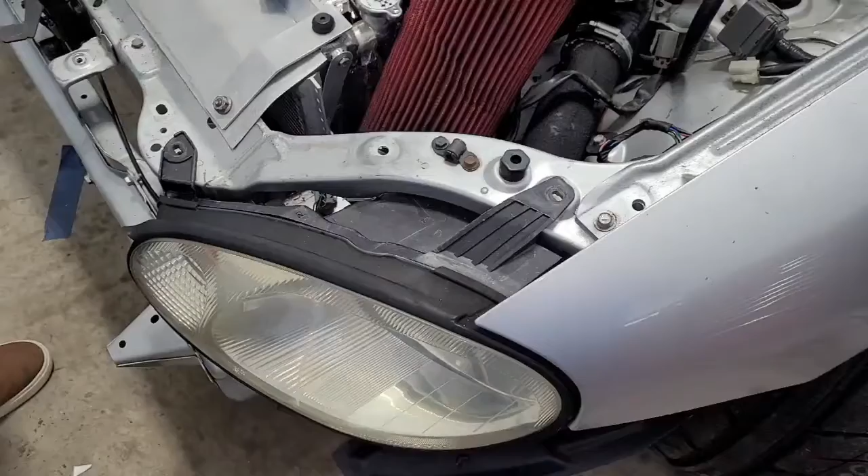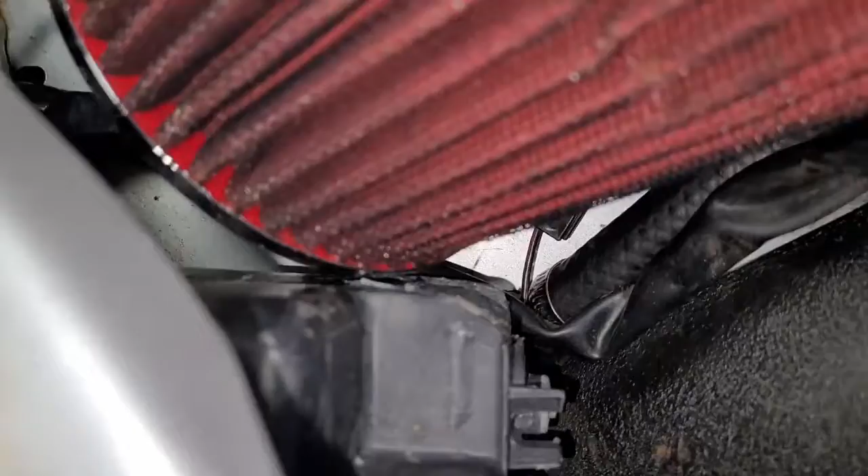So my buddy Jacob said, hey, we should test fit a headlight, make sure it's going to fit. So I put this up in here and got it roughly lined up. He was worried about it hitting the air filter, and I was like, look, we got plenty of clearance. I mean, look at this. We don't have feeler gauges, but that's at least 20, 30 thousandths. I don't know what he was worried about.

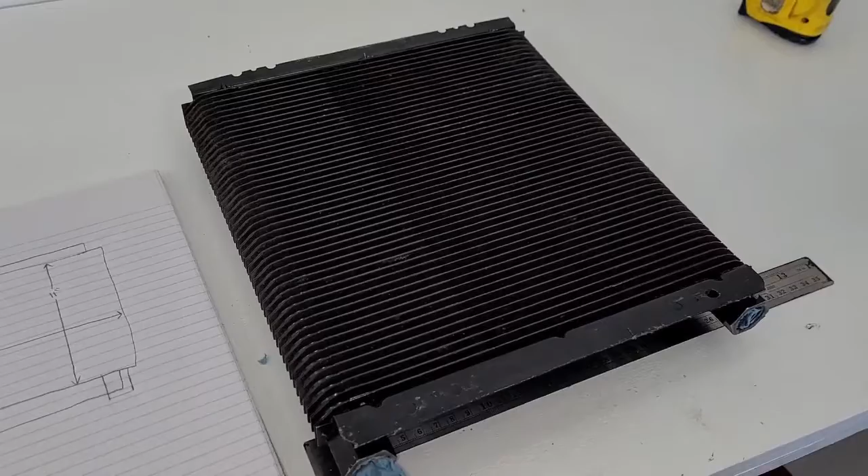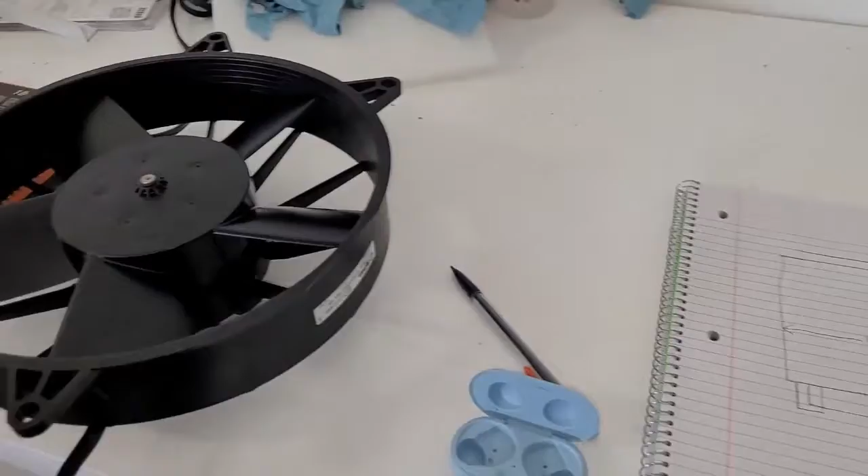Hey guys, welcome back. So we decided we're going to build this fan shroud the way we talked about. The first thing we got to do is get accurate dimensions from the heat exchanger, and we need accurate dimensions on the fan, and then we can put both of those in our 3D modeling software and develop a shroud that fits the two, so we know what we build will fit these components.

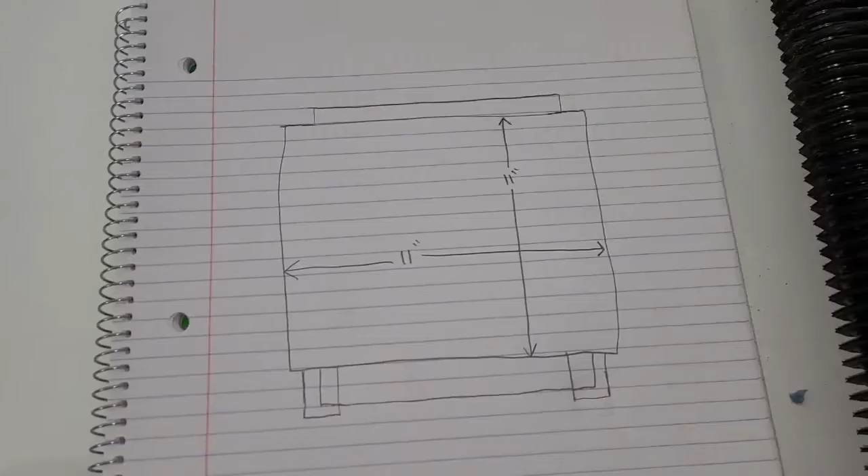My buddy Jacob here is going to help me build this. We laid this heat exchanger out on a bench. We got a rule, a tape measure, a caliper, and just a piece of paper and a pencil. We already started, as you can see here, we got the basic outline of the core itself. If you notice, we trimmed this top flange previously, so we don't have the full flange there, whereas on the bottom here, we do have the full flange.

So we're going to document the dimensions that we have. I think we can make this work. We'll just have to drill some extra holes in this section, but it should be big enough. So we're going to get our critical dimensions, which is basically just the core, the flanges, and then we're also going to model the fittings and the thickness of the core. That'll pretty much sum it up for the heat exchanger.

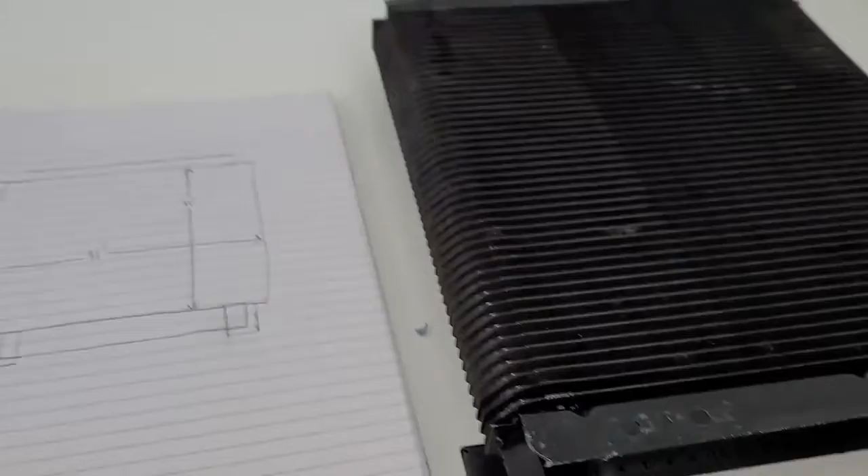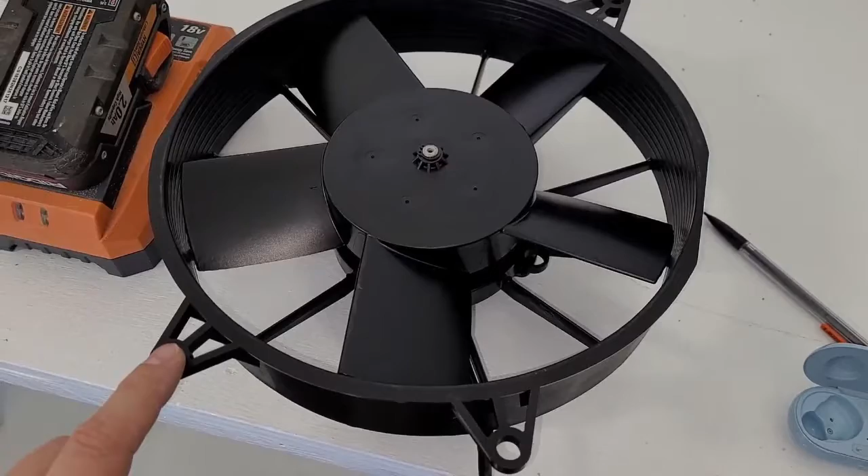And then on the fan, we don't need to worry about all this, but we'll get the outside dimensions, the center to center on all the holes for the bolt pattern, the general thickness, just the rough outside dimensions, and that's about it. So I'll show you that progress as it develops.

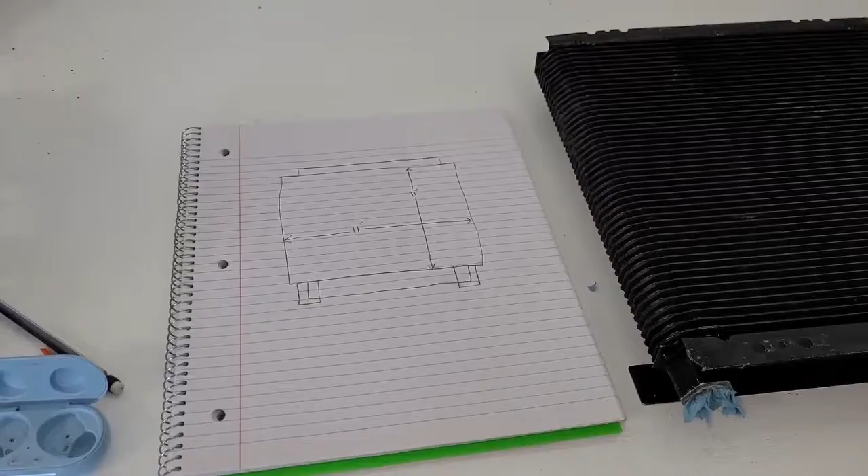Alright guys, here's some of our dimensions. Jacob's finishing up the measurements, I'll show you what we got. He's measuring these fittings right here, we'll have that shortly. But you can see we drew our flange down here, and we picked up all our holes using a caliper, got our dimensions.

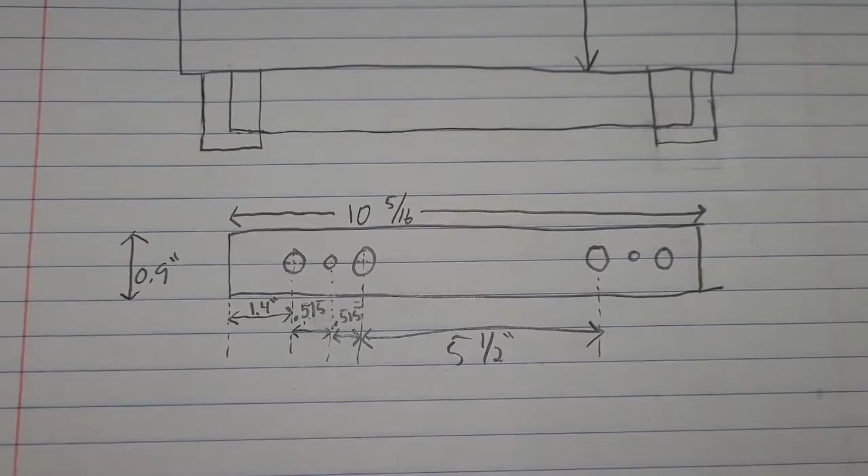And you can see some of these are common numbers like 0.9, 5.5. So that kind of gave us confidence that we got this right. But we did measure it with a caliper, so we got those dimensions.

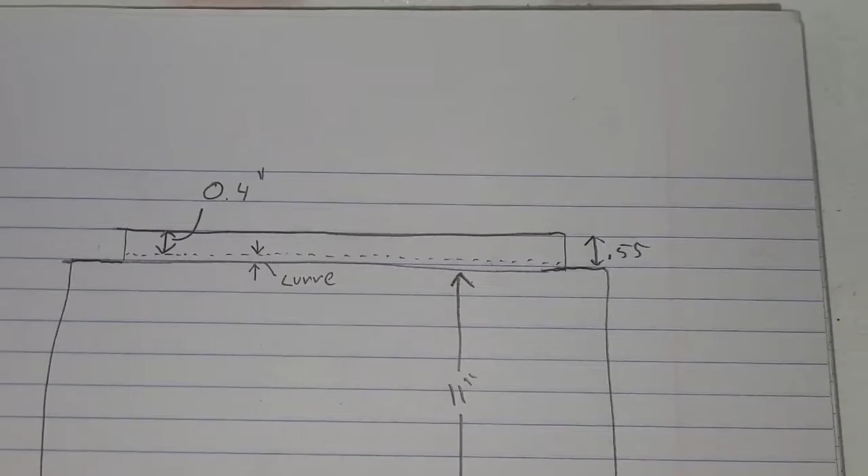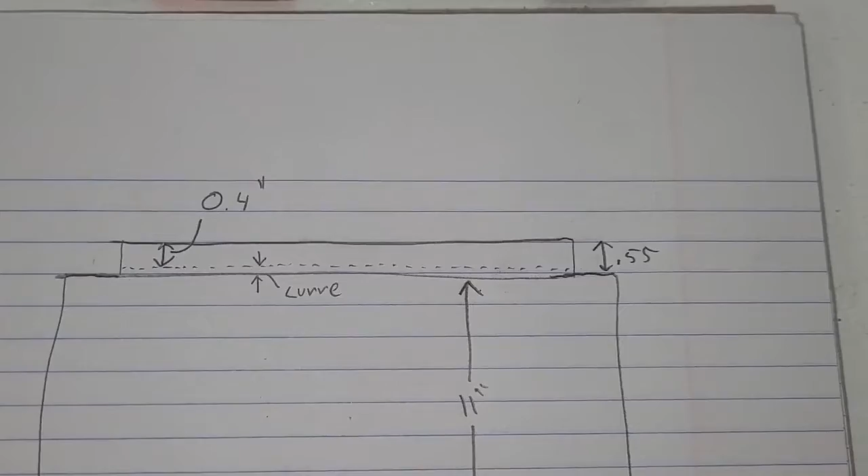And the flange up here is basically a mirror image, but we had cut that one short, so we included only the relevant ones. The total flange was 0.55, but there's a little radius where they bent the metal, so the flat portion is only 0.4 inches on that one. You can see we lost about 0.15 due to the radius. So this one down here, we also are going to have lost 0.15. I should probably make a note that that's true.

And that gives us the rough dimensions for the heat exchanger. We still got to pick up the thickness as well, and then we'll put the fitting dimensions, and that'll be it for the heat exchanger.

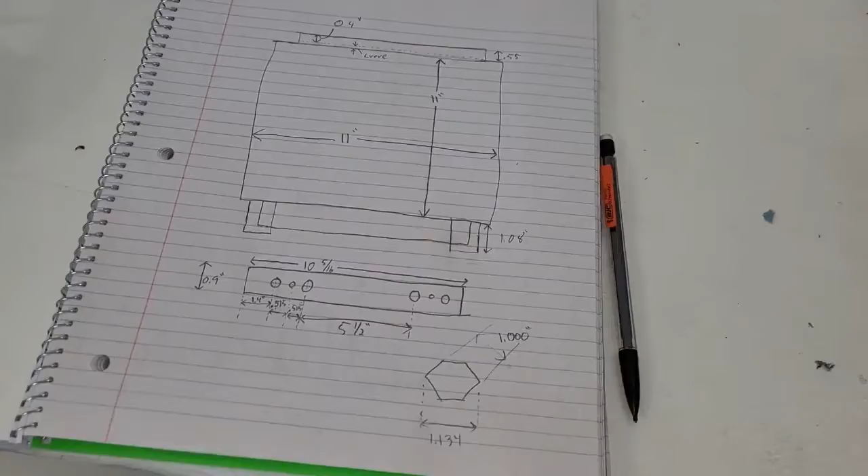Alright, so we finally got the rest of these dimensions. So we captured this hex, which is actually just one inch on the flats. And I'll show you, we got all the flange dimensions here, but look, we got two more pages.

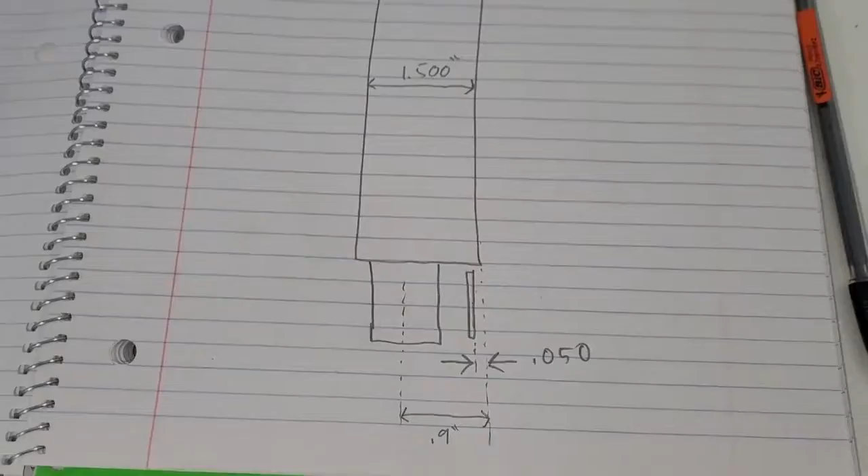So here the core, we captured the core thickness of 1.5 inches, and we picked up our flange as 50 thou. Oh, we forgot to measure how thick the flange is, but it's 50 thou away from that surface. And then we got the center distance from the core to the center of the fittings.

And then lastly, we noticed the core, if you look at the side profile, it actually has this weird geometry going on the edges. It's not square, and it's kind of hard to see, but they actually put a radius and then a 45.

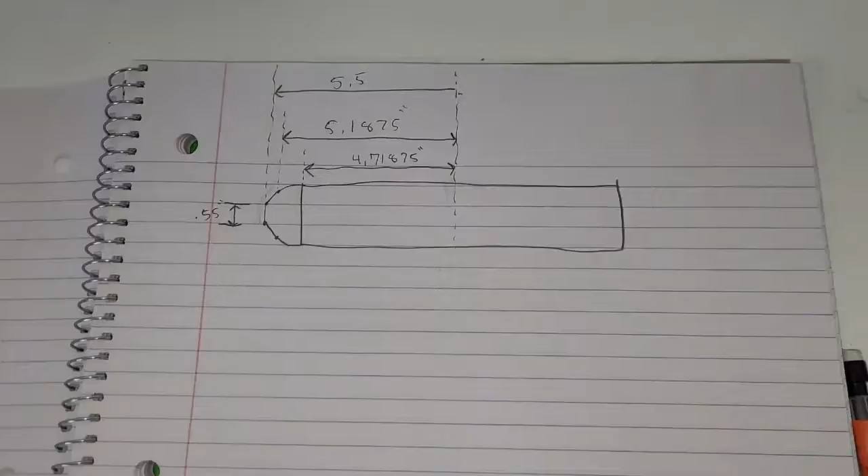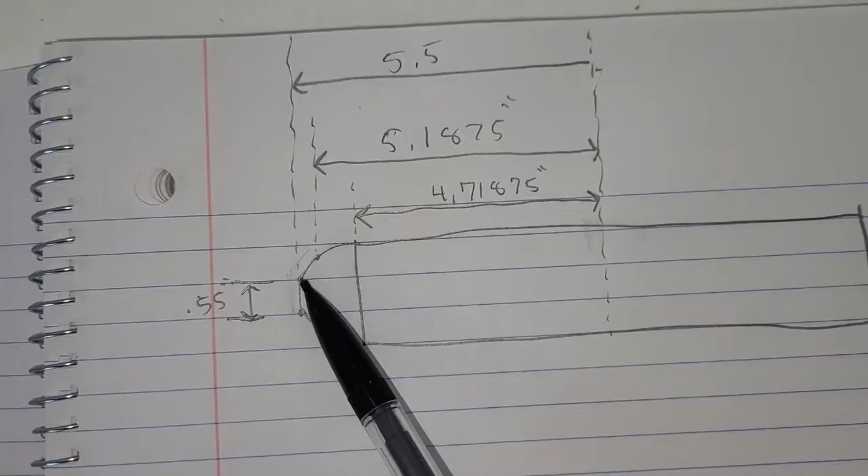So we ended up capturing those dimensions as well. This is from the center of the core. You can see we've got our little radius. We don't know what the radius is, but we know it exists, and we know it stops at this dimension. And then this 45, probably should have put that that's a 45.

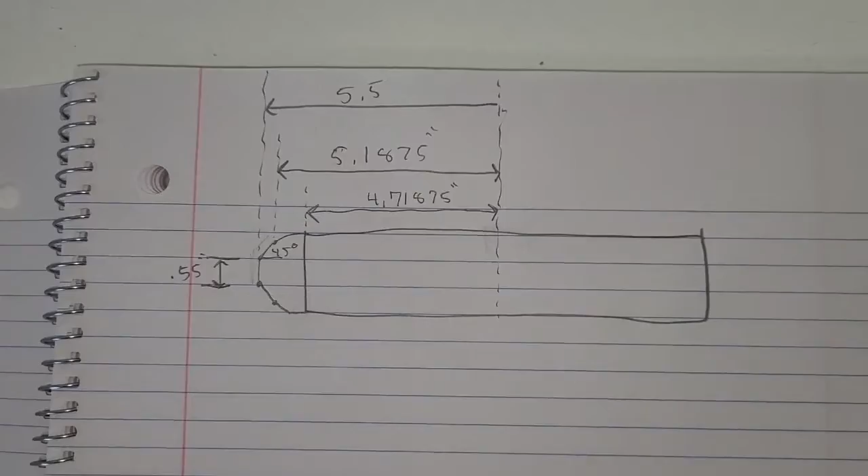But that continues, and then we know what the flat is. So we kind of measured the things we could, and we'll figure the rest out in CAD. We'll grab the flange thickness of the sheet metal, and I think that'll do it for the dimensions on our heat exchanger.

So we're getting ready to pull our measurements for this fan, and we actually looked on the box. The box does have a few dimensions, but they only have these three: length, width, and depth. That's really it. We need the center to center on all the holes. And here's the thing, it's kind of hard to measure. So if we flip this over, you can try to measure, but you don't really have a reference.

So here's what we're going to do. We're just going to take this old box and cut a flat piece of this and lay the fan on it. And without moving it, we'll use a Sharpie or a pencil, and we'll draw the center of each circle. And then from there, we can remove the fan and put a tape measure or a caliper or something directly on the cardboard and pull our measurements that way. So hopefully that speeds this up some.

Alright, so we just threw the fan on here and drug a pencil around it, and here's what we got. Now we've got all of our dimensions on a flat sheet of cardboard, and we may need a bigger ruler, but now it's as easy as just creating a datum and taking measurements. We also drew the circle, so that's roughly the dead spot in this fan.

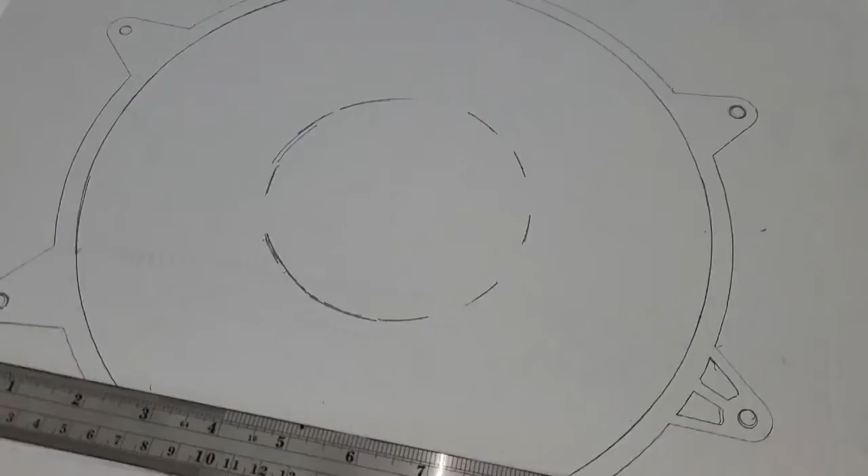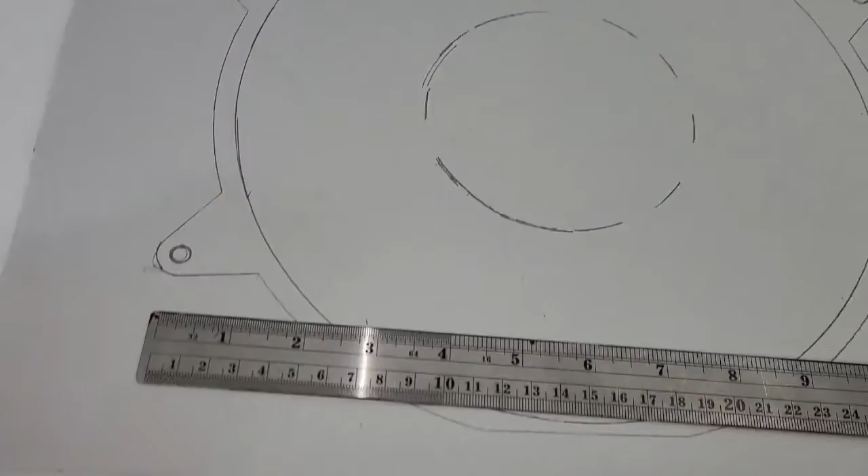So if you look at the fan, you'll see it's got blades, but there's this huge dead spot where the motor and fan blades connect, where there's no airflow, which is what you're trying to fix when you build a shroud. You're trying to get air to flow in this portion, and also, our heat exchanger's like up here, you know? So this corner would get left out, and so with our fan shroud, we're basically feeding airflow to this portion of the heat exchanger on all four corners, and also feeding air to the center. So we get more even airflow and hopefully more heat transfer, for a more effective heat exchanger.

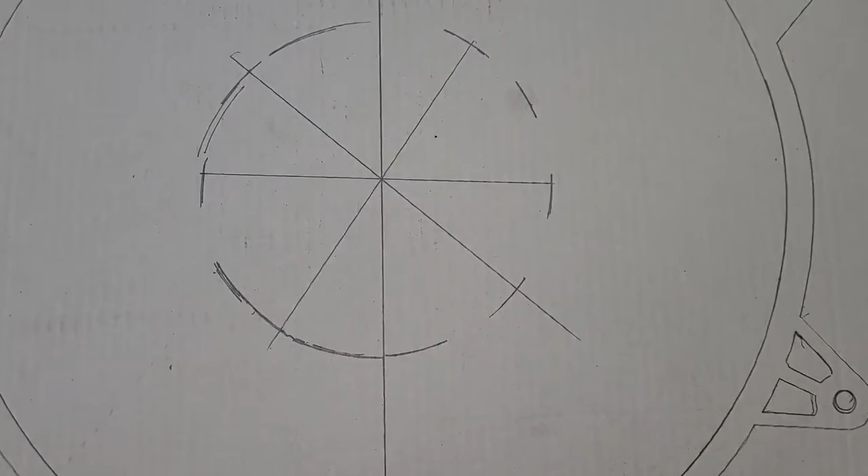Alright, so we needed a datum to have a center to work off of, so what we did was we just drew a straight line in our circle from, say, here to here, there to there, and as the lines intersect, that shows you where the center is. So you can see it's easy to see now. Now that we know where the center is, I want to draw an XY coordinate system on here. So if you back up a little, we see we got a little carpenter's square.

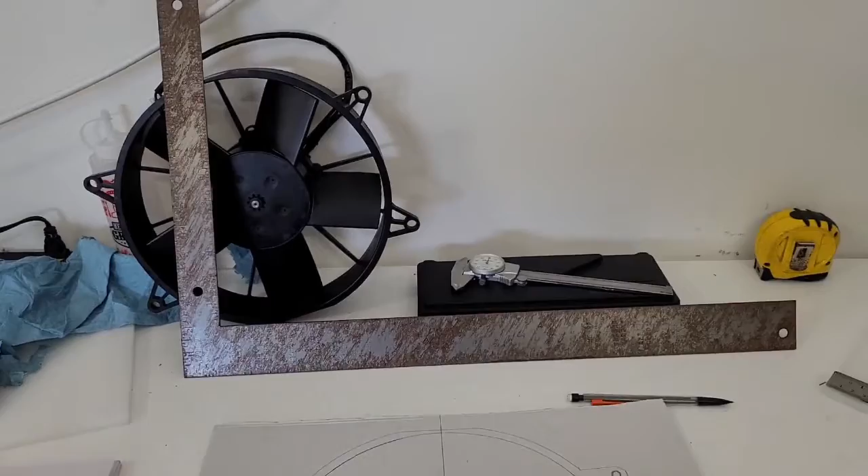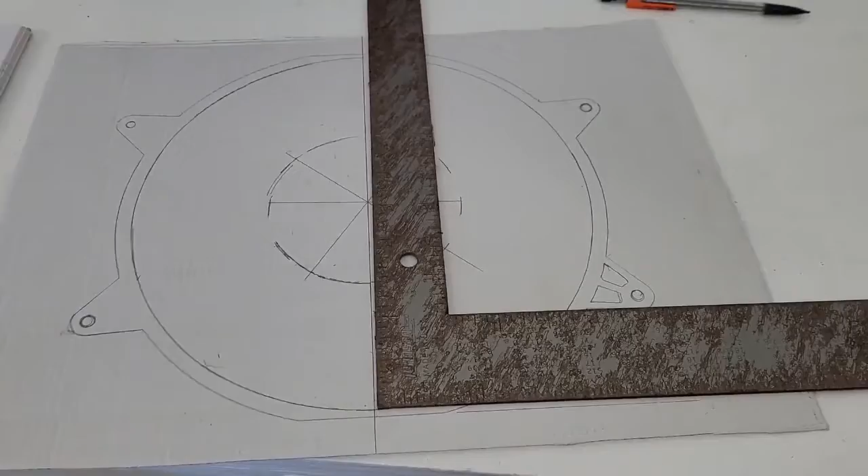And all we did was, there's a flat down here on the fan. So roughly speaking, we just took our square and lined it up off that flat and then extended that line that way. And once we had that, we used that line squared over here to draw our y-axis. And now that we have our y-axis, we're going to come up here, line up on our y, and draw our x. So we're about to do that now, and then we'll extend it this way, and at that point we'll have an XY coordinate system at the center of the part to take all our measurements from.

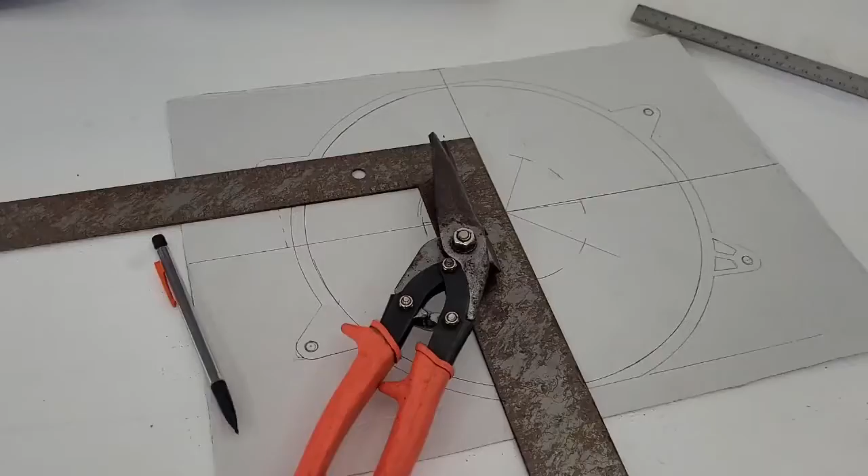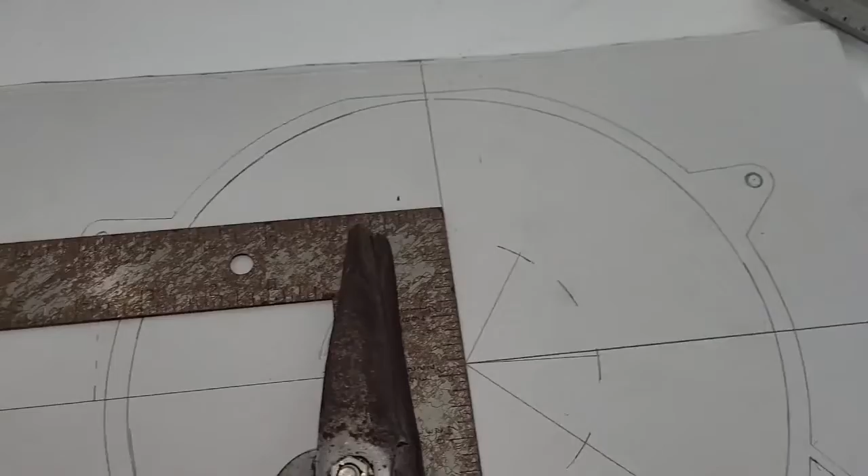Alright, so we finished drawing our x-axis, and now we've got an XY that intersects the part. Now we'll start taking our measurements. I'll show you how we're doing this. We're trying to get the XY coordinates of that hole relative to our datum. So what I did was I took a square and I lined this up on our y-axis. So you can see that line there lines right up with our square. And then it comes across at that angle and intersects the center of that circle. And then we just drew a dashed line across. So I'll shift this a little and you can see. That's how we created that line.

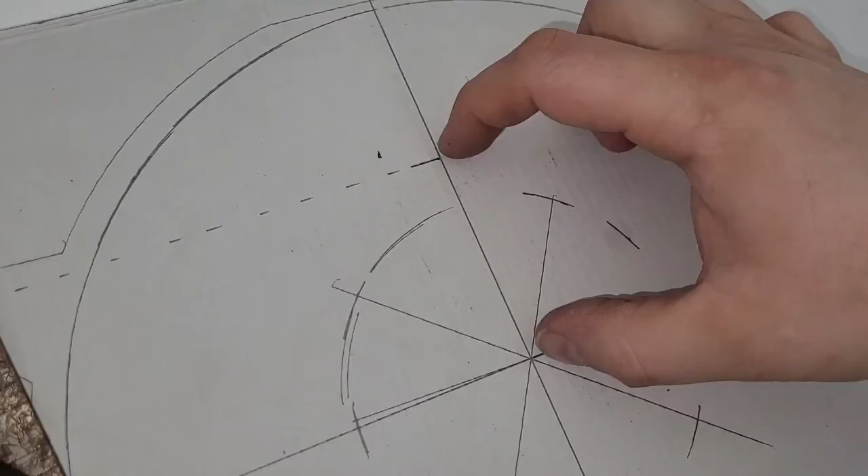And now that we've done that, once I get this equipment out of the way, I can just come in here with a caliper and measure that. And that'll tell me the y dimension of that circle relative to our datum. We can do the same thing here, and that'll tell us our x dimension relative to the datum. And that's it. Pretty simple. That gives us the XY coordinates with pretty high accuracy.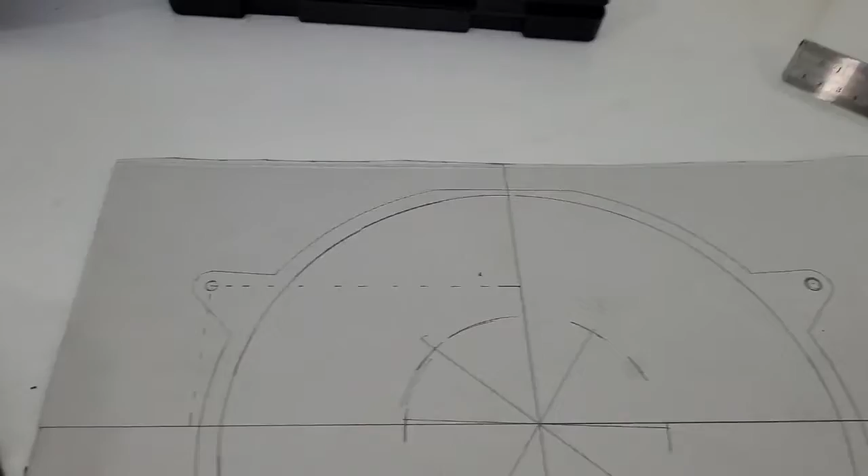And we're about to do this on the other side, but I'm going to guess that this is all a mirror image. So this hole here will be mirrored across this axis to this side, and then both of these holes will mirror across this axis. We're going to check real quick, but I'm pretty certain that'll be the case. So really, we'll just have to do that one, and we'll have the dimensions for all of them on both sides.

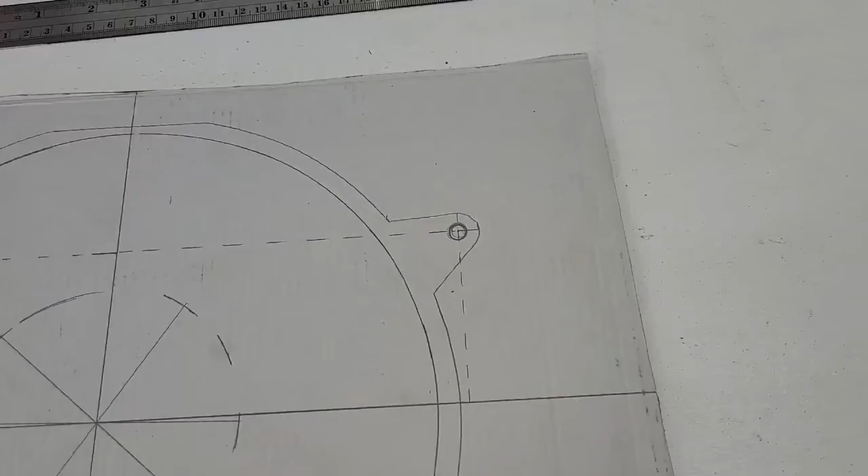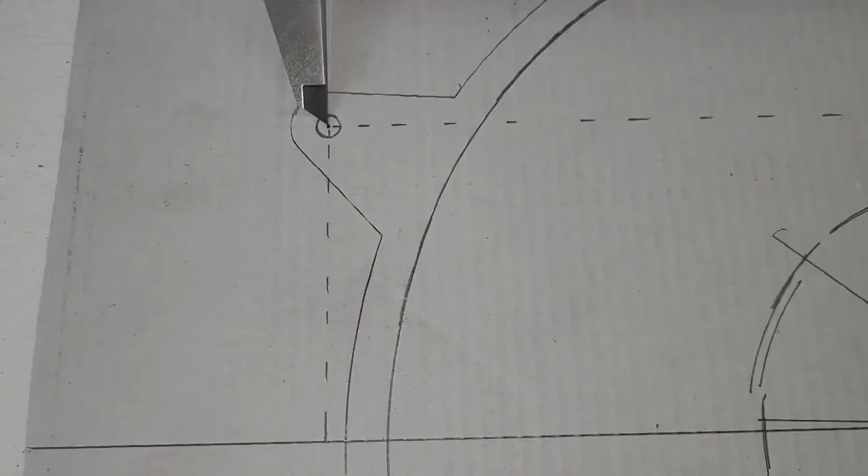Alright, so we got our dimensions for the one on the left. You can see we got our lines drawn on the right. And now, if I can do this one-handed, we're going to measure this with a caliper and see what we're looking at. So we'll put this jaw right on the center of that hole, about like that. And we'll move our outer jaw. Try to hit this line. There we go. We're pretty much at 5.7 inches.

Now we're going to shift over to the other one. That is not 5.7. Well, we'll check our stuff. Maybe our datum's off a little bit. Alright guys, well, it turns out we did get the datum wrong. You'll see in the next episode we're going to get that fixed and finish this up.